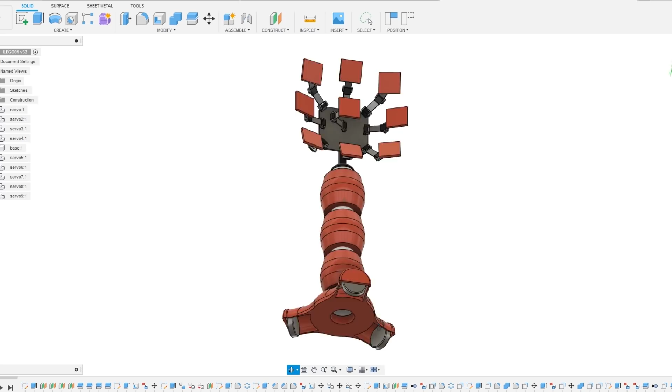So you'll have noticed when I was building this that it's made up of 9 tiles, so I'm going to be building a robot with 9 robot arms that can hold each of the tiles and break the image up and put it back together, and that's going to be on this base that we made last time with an illuminated core and omni-directional wheels, and that's going to carry the 9 robot arms.

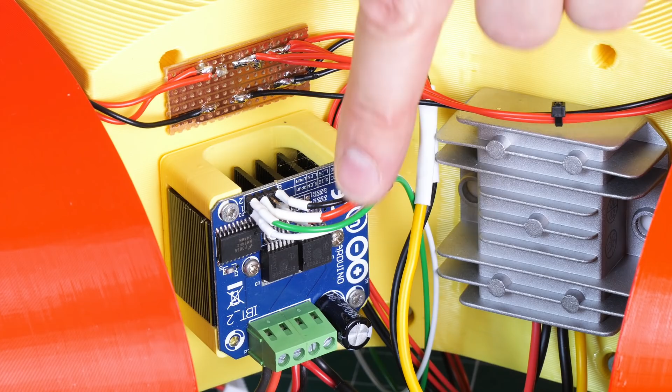We left wires sticking out the top of this in part 1, and these are PWM wires that go down to the base to drive the motor drivers to actually control the wheels. We've also got 5 volts and grounds coming back up. So before I fit the robot arms and everything on the top here, we're going to put some electronics in and see if we can control those wheels.

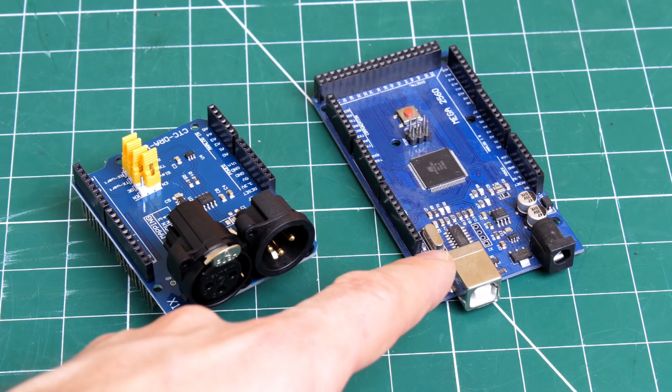Our main microcontroller is an Arduino Mega, and that's because it can control up to 48 servos. We need 27, as well as the 3 motors using 6 PWMs. And we're going to be putting this shield on, which is a DMX shield, so I can control everything with DMX software. That's similar to what I did in my Performance Robot series.

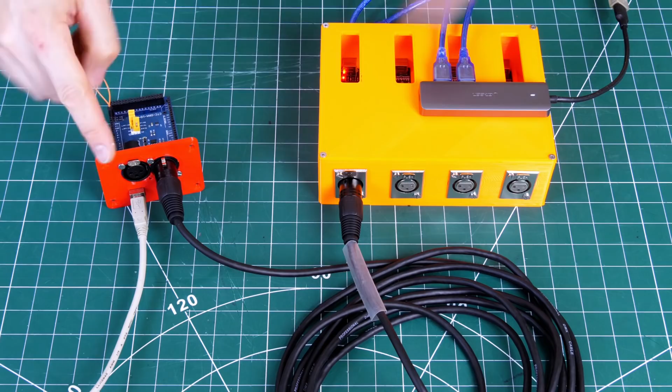So here's my test setup. I've got that shield attached, and I've got a little 3D printed chassis mount there, which we'll look at in a minute. And I've also jumpered my serial, so it's using serial 1 on the Arduino Mega instead of serial 0, so I can still use the USB debug.

This is a DMX interface, which is actually lots of RS485 converters in a box attached to a USB hub, and I've got for now a DMX cable attached from one of these onto my Arduino shield for DMX, and eventually we're replacing this cable with a wireless solution.

And I've written some code on the Arduino using the DMX serial library, and I've hacked that library to use serial 1. There's actually a switch in the source if you look at that, and basically I've just set up a receiver and set up the serial port so we can debug it.

Down here all we're doing is saying if 10 milliseconds has elapsed, then go and read 2 channels and go and print those out to the serial terminal. So I've got my serial plotter here, and I've also got some DMX software attached to that DMX interface.

This is Q Light Controller Plus, which is free open source software. So if I go and move these 2 channels, we should see that we've got data on the Arduino coming back through that debug. We don't want a cable trailing round though, so I've got this wireless DMX interface.

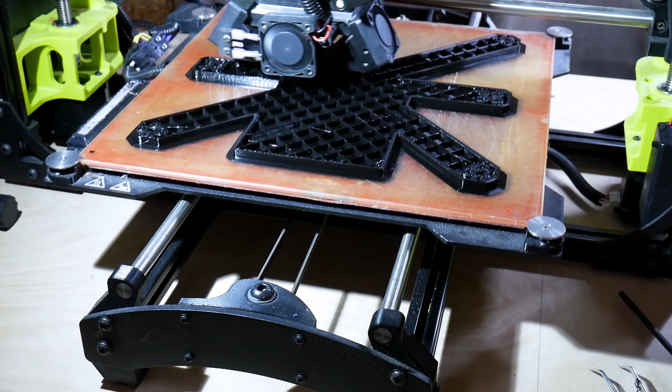So I've got my Arduino, the shield and the DMX dongle all connected to this curious star looking thing. The dongle actually needs 5 volts, so I've run the wires into the 5 volt terminals of the Arduino.

And I've also got this flat plate, and that sits underneath, or more accurately on the other side of that aluminium square section pole, and that is going to hold the robot arms, and this is going to mount the electronics. I've got these red standoffs in between the two plates, and those are the places that the 9 robot arms attach on the front.

So I've got my 5 volts and ground that go to the batteries and the regulator in the base of the robot, and for now I've connected one digital pin, and that goes down to the base as well to the other Arduino that controls the lighting.

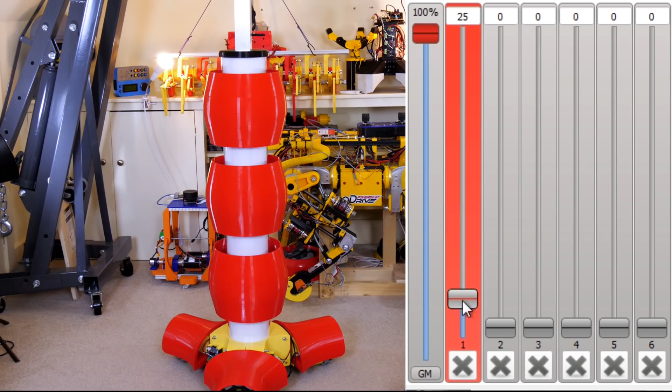And that turns on and off the lights remotely when I fade up and down a DMX channel. And yes, we could of course fade those in and out instead of just turning them on and off, but that actually turns the lights on and off really quickly to achieve that effect, and that wreaks havoc with the camera and the shutter rate, so for now they just come on or they go off.

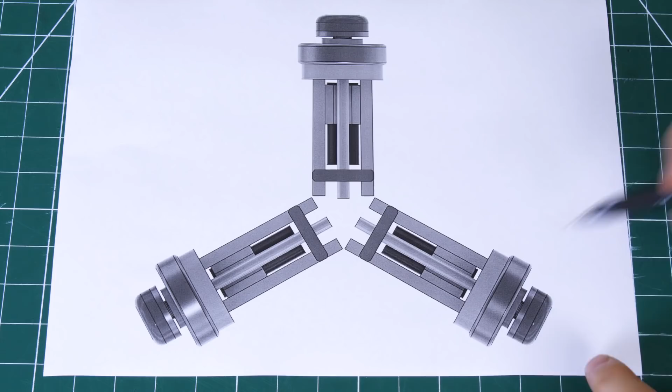But that's the least of our problems. We've still got to drive round and we've still got to control 9 robot arms. So let's talk about driving these wheels. We've got 3 Omni wheels and they're all 120 degrees apart from each other to make up our 360 degree circle. And we need to be able to drive forwards and backwards and left and right and also rotate.

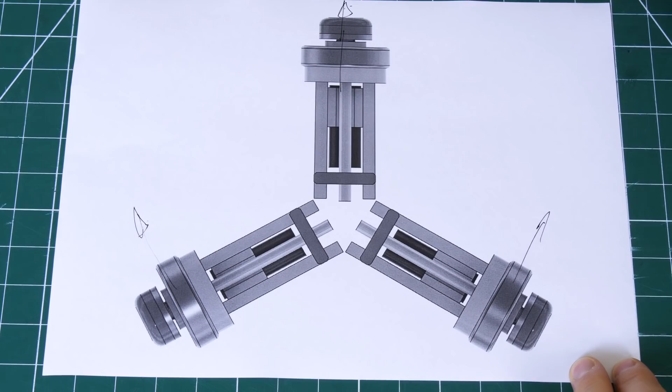Driving forwards and backwards is easy enough because we can just drive these wheels in this direction, and this one will slide because it's got those little Omni wheels all round the outside, so that's very easy. But what about when it comes to driving this way?

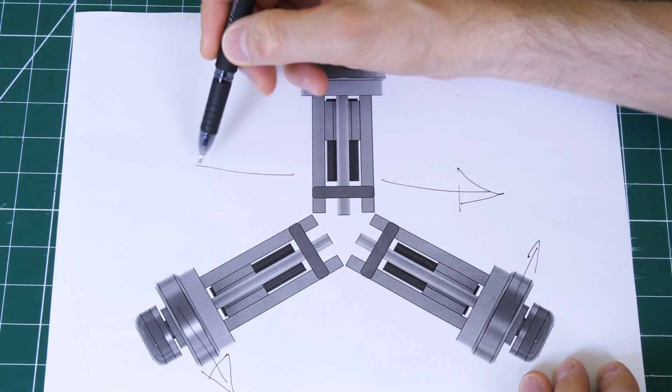Well, that's not too hard. We can drive this wheel this way, and this wheel this way, and this wheel this way. But these aren't all facing in the same direction, so we need to work out the velocity to drive these wheels proportionally so that it goes in a perfectly straight line, and we need to do that in both directions. But that's a really easy problem to solve.

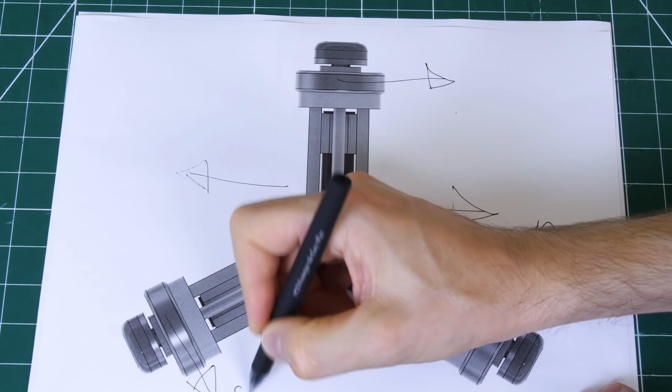If we think about our 3 wheels here, which are 120 degrees apart, and we extend this line to make a right angle triangle, we need to work out the relationship between this length of line and this length of line. That's easy to solve with trigonometry. We take the cosine of this angle to work out the relationship between these two, and that's the cosine of 60 degrees, because that's half of 120 degrees, and the cosine of 60 is 0.5. What you'll find is that this line is exactly half the distance of this line. So all we need to do is run the wheels here at 0.5 the speed of this wheel.

One of the challenges with using DMX to control a robot like this is that there's no negative numbers in DMX. All we get is channels that range from 0 to 255, where the default on a lighting desk or in lighting desk software is generally 0. So we could say that 127 is stationary, moving up to 255 makes it drive forward, and moving down to 0 makes it drive the other way. But I really don't want to be in a position where 0, the default, is driving full speed in 2 directions and spinning as fast as it goes.

So instead I'm going to assign 6 channels for driving, all with 0 as the off position: 1 channel for driving forwards, 1 for driving backwards, 1 for driving left, 1 for driving right, and 1 for twisting in each direction, which just adds something to all the wheels because they all face in a circle anyway. So we've got 6 channels assigned on the desk.

The first one, as before, turns the lights on. The next one makes it drive forwards, the next one makes it drive backwards, the next 2 make it drive either way in a straight line sideways, and the last 2 make it rotate in either direction.

And yes, we're going to be mixing those together and doing fades and transitions between them so that we can do all sorts of fancy stuff like drive along while turning and transitioning sideways and all sorts of things like that. But that demo's coming up later in the video.

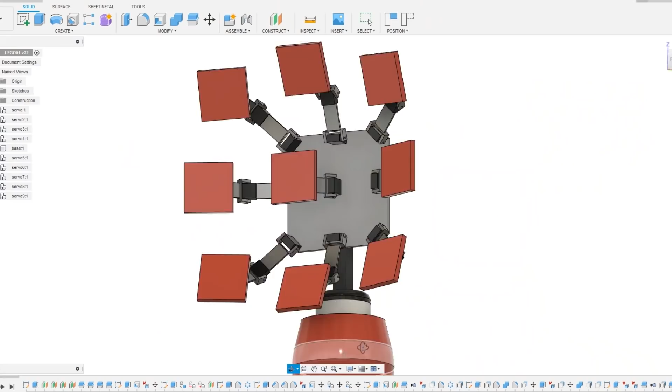Right now we need to build the 9 robot arms to hold the Lego art tiles. Each one of those has got 3 motors, so that's 27 servos that need assembling and wiring in.

So that's the first 9 servos partially assembled. We're going to fit those on the robot to calibrate all the 0 positions, and then we can work on the next 9 and the next 9.

There's quite a bit more wiring around the back now. We've got those servos attached to 9 digital pins on the Arduino, and we've got an additional 7.4 volt LiPo which is powering them because they'll run straight off 7.4 volts, so we don't need any extra voltage regulators. But let's see what they do.

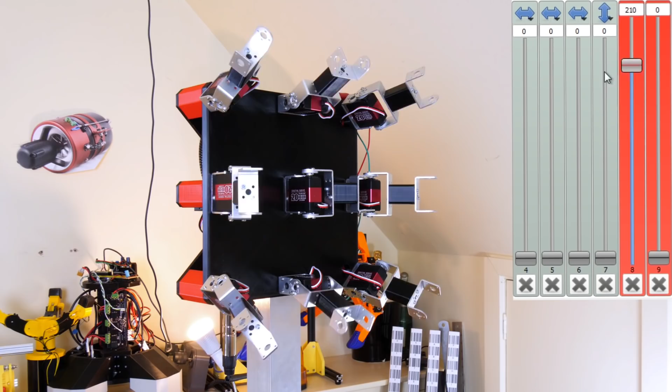All of the outer servos are attached to one fader, so I can move them all at once, and that won't be the case with the next 2 stages, which will be independent, but for now this is just the main feature to open and close the display.

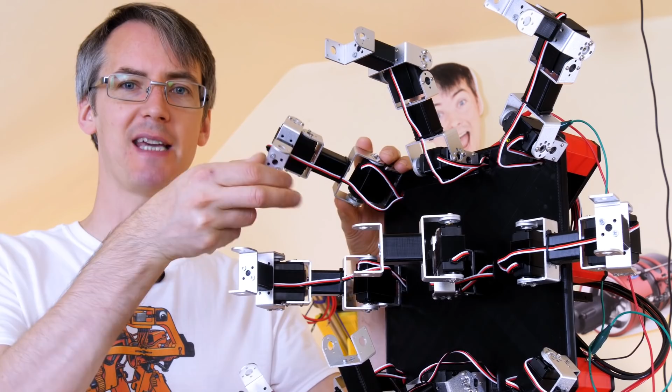The middle one's separate, and that's because it's special, so that's on its own channel for now. On top of those 9 motors at the base of each arm, I've now added 1 for the middle, and we've still got 1 to add that's actually going to tip the Lego tile on the end, and that means we can do all sorts of fancy effects moving them all the way around.

I've also covered my servos with black covers, so we can't see that red and white writing anymore, so it doesn't detract from the Lego art set, and we just keep this as bland as we can.

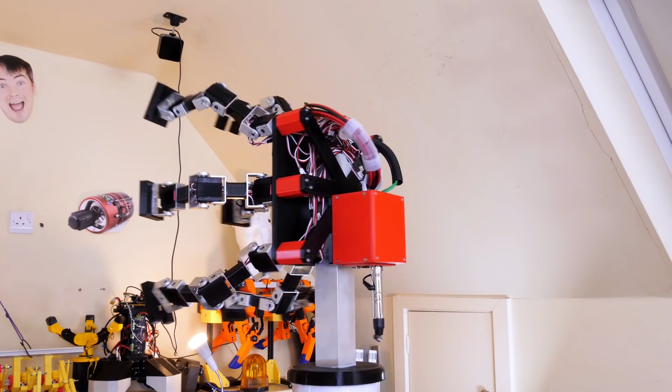So that's all of the 9 arms built with 3 motors on each one, and at the end of each arm we've got this clamp, and each clamp holds 1/9 of the Lego art set. Now I need to break this up, attach all the pieces, and I've got quite a lot of calibration and programming to do.